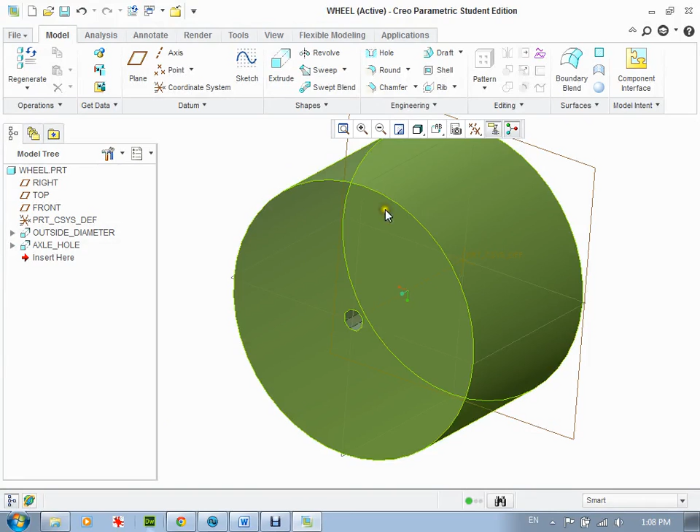So welcome back, this is now the second part of the tutorial. You'll notice that I have my basic cylinder and I have my axle shaft right now, or hole.

So what I want to do on this tutorial is add a bit of depth for the rubber or elastic bands you're going to put here for tire tread, because plastic on wood is really slippery, so we need to add something here. I'm going to take out a bit of material to actually give you a spot to put some tread. So first off I'm going to click on the object with my left mouse button.

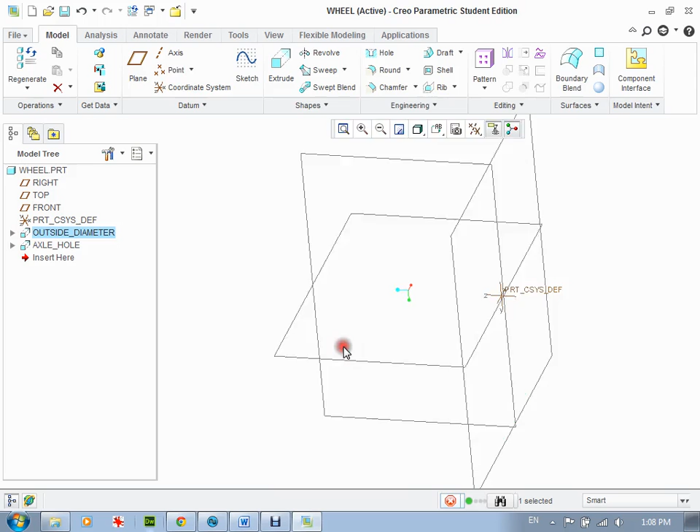Then I'm going to right mouse button, hold it for a second, and go to Edit Definition. Now this brings it back into the depth of the tire. So if I wanted to change the depth of the tire right now, or the rim, and make that 2 inches, I could just change this and put in 2. Right, way thicker now. I can just undo it up here. Okay, but I don't want to do that.

What I want to do is make sure that this cylinder, when I draw, is centered later. You notice how the drawing is over on the side here. I want to center it, and I forgot to do that in the last tutorial.

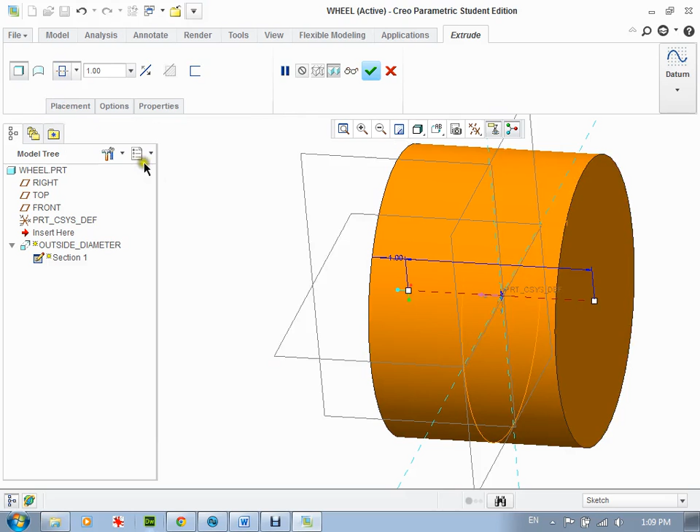So I'm going to come up here beside the 1, and click on this one, which basically makes it symmetrical on both sides, so it extrudes on both sides of the sketch plane. We click on it and all it does is move it to the center. I'm going to click OK. So now I have this plane that's in the dead center. I'll explain this in a second, but you'll see what's going to happen.

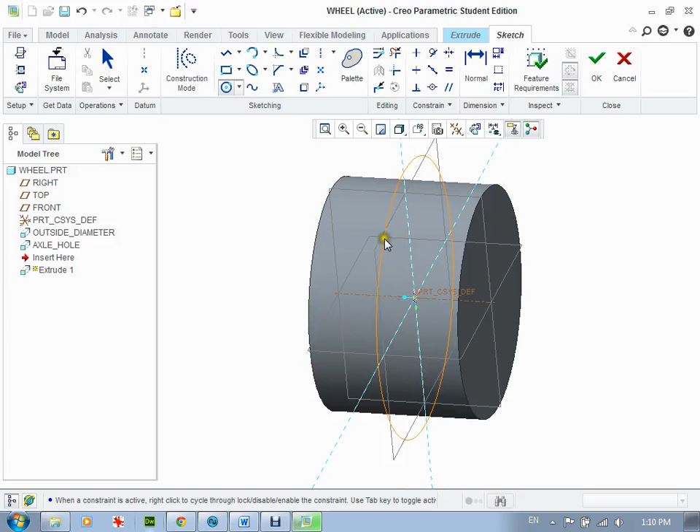Now I'm going to click on the plane and go to extrude. Now I'm working in the center of it, and I'm basically going to draw another circle, making it so that it is a bit smaller. You can't really see what I'm doing here, so it makes it easier if I go back to 2D sketch view, and you can see that there it is. The sketch is a little bit smaller, indented in. Click OK, and you can see it.

Now I can change that number. Let's change it to an easy number, 1.4. Okay, so it's a bit smaller. No, better yet, let's go 1.3. And it doesn't matter what you do, this is just an idea or a concept.

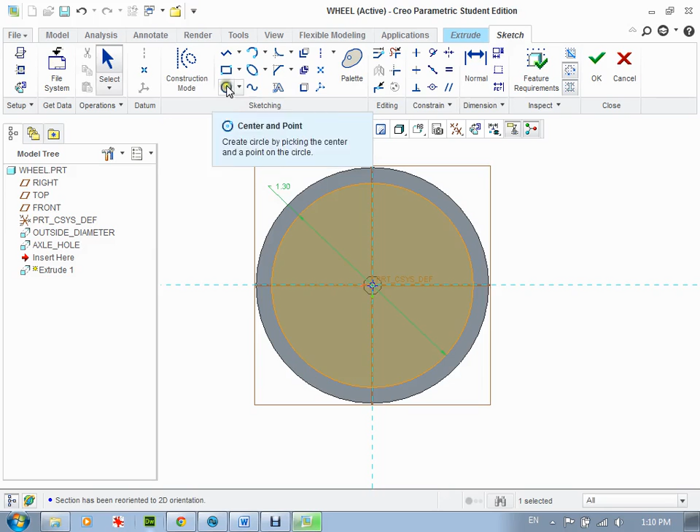Now the next thing I want to do is draw another circle, and I want that circle to be bigger than the outside, so I'm going to click it a bit bigger. I'm going to click the select tool, and now you can see that it's there and it's dead center. Now I click on OK, and you can see how it goes to one side.

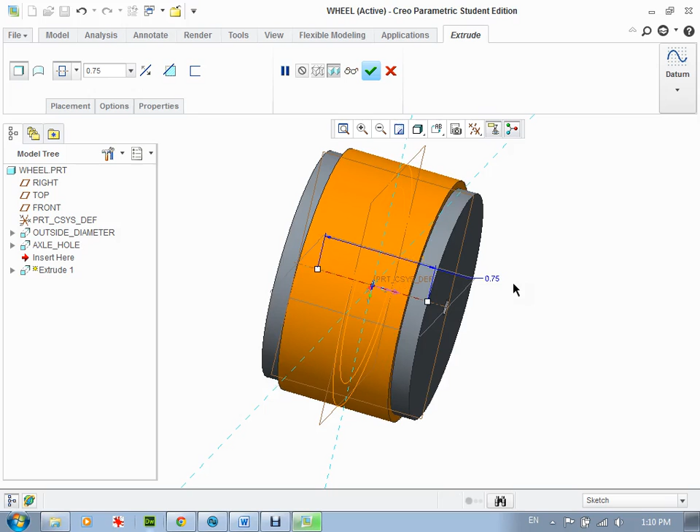But if I go back to the symmetrical on both sides, now you can see that I have a bit of depth there. I know it's 1 inch, the tire, and I'm going to change this one to 0.75, so I've got about 1/8 of an inch on each side. Then I'm simply going to remove the material, and now I have a bit of a rim. I'm going to click OK, or the select tool.

Now I'm in this, and again I'm going to click over here to the model tree, and I'm going to check it, and I'm going to call this the rim depth. Okay, there's a name. And I'm going to look at this a bit. Okay, I'm kind of getting there.

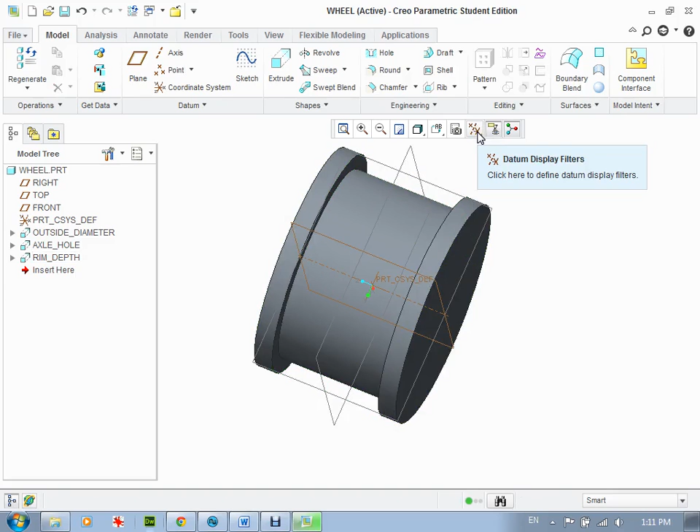Now, you notice there are all these different planes and things on here. It's getting to be a bit of a mess. If you go up here, there's the datum display filters. I can actually turn everything off, and now I can just see the object as is.

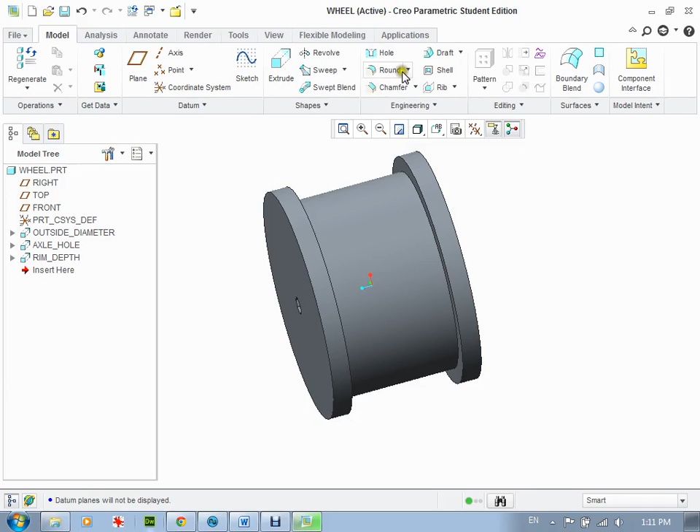So now I'm going to say, what else do I want to do to this thing? Well, probably want to round off the rim edges a bit. So I could click on an edge, or better yet, let's go to round first. And it's going to take you into a whole different thing, the round tool.

Now I can go and click on an edge, and you'll see that it automatically rounds that edge over. Now if I hold the control key down and select the other edge, and select this front edge, and select this edge, they all do it at the same time.

Now because it's 0.3 here, I can actually change that to, I don't know, 0.05, and it makes them a bit more. I can drag it. You see it can only go so far. I can drag it back, right? So I'm going to leave it, let's make it 0.06.

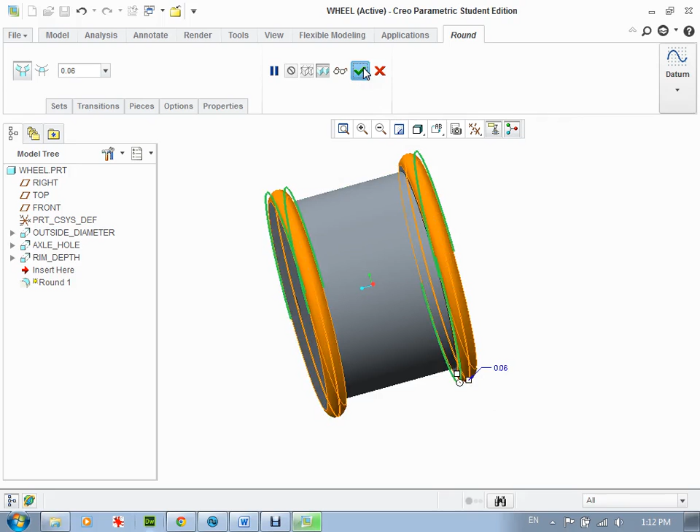And I click on apply. And now I have some edges. Now you can see, oh, it looks like there's a bit of an edge there, right? So I don't like that.

So I'm going to click on the edges, right mouse click and hold, and edit definition. Now I can go back and change this. I'm going to leave this at 0.05. Okay, so there we go. There's kind of my rim edges now. That's not looking bad.

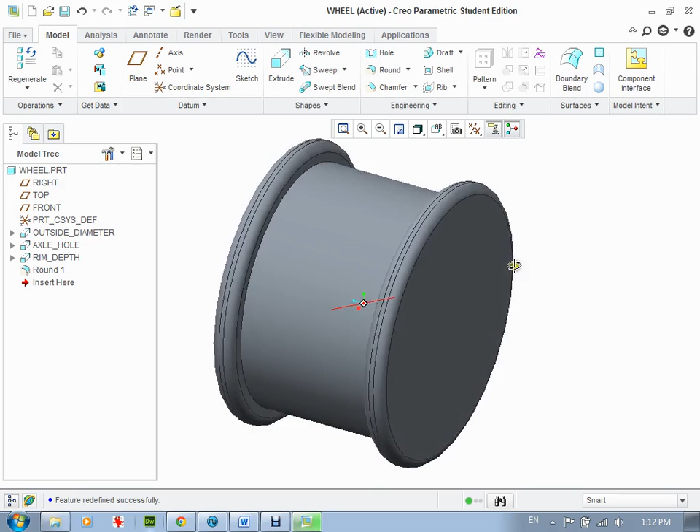Okay, now the next part, I'm going to take the front surface and go extrude. I'm going to go in sketch view, and I'm going to take a bit of a depth out of this thing. So I want my rim to go in a bit. I'm going to go OK, and now I can reverse direction.

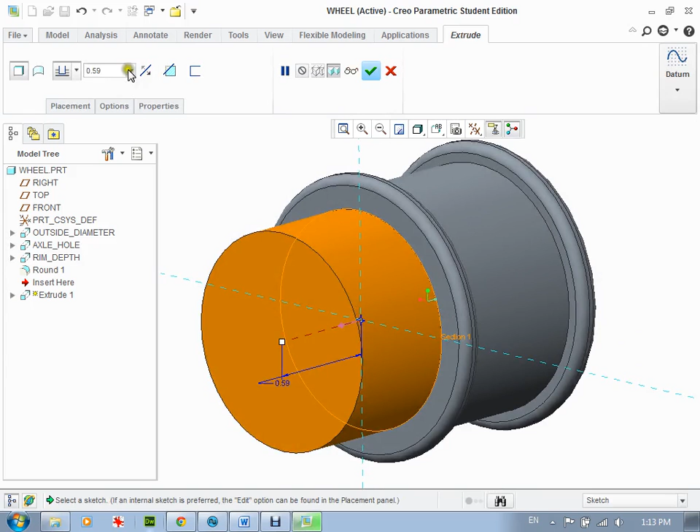Remove material, and oh, I got the axle hole through there, so I don't want to go that deep. So I'm going to take this and drag slowly until there's the axle hole, it doesn't go through, right? And go okay. So now I've got a bit of a depth there.

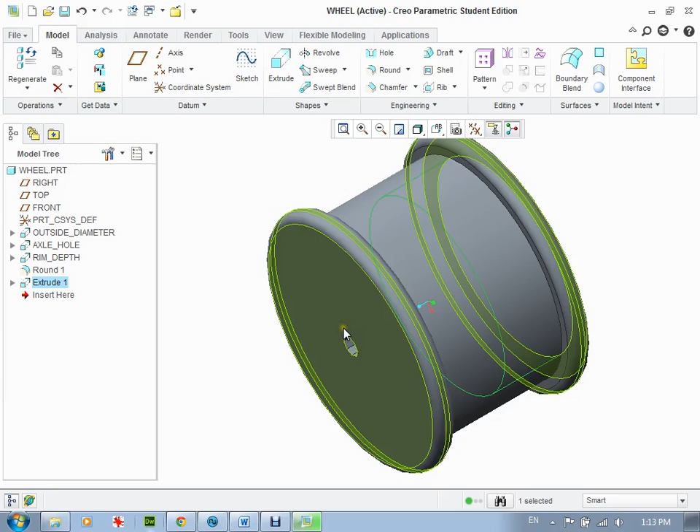Now you've got to realize when you design this, the back has got to sit flat on the 3D printer. So do not, whatever you do, take anything out of the back. Just leave it flat like that because it's going to sit perfectly flat on the 3D printer when it prints. Okay, so I've got that basically done now, and I don't like the size of that, so I'm going to go back to here.

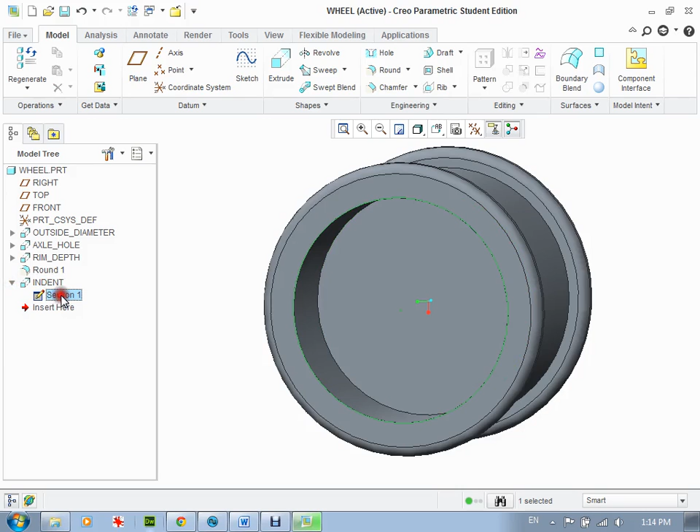I'm going to name this the, I don't know, let's call it indent for lack of a better name. On that indent, I'm going to go to the section, right mouse click, edit definition, and I'm going to make this a bit bigger. I can take this and call it 1.25. And I'm going to go okay.

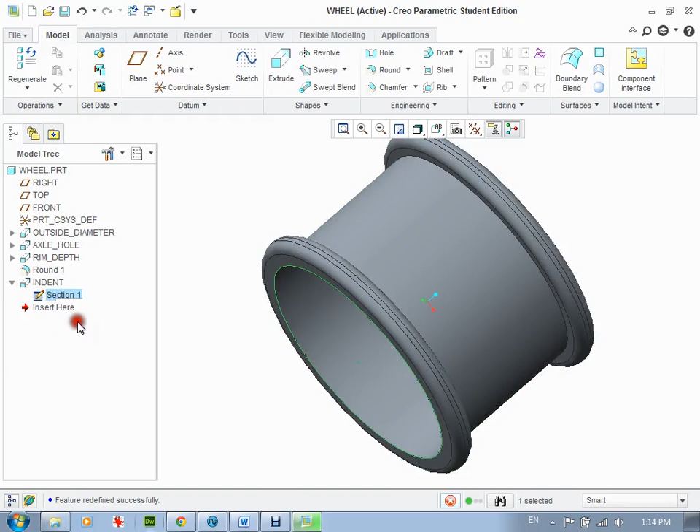And if I look, yeah, no, I didn't go through. You can always look and see, oh geez, I didn't go through, right? But if I change this and say, well geez, what happens if I went bigger? I can take this and go, I don't know, let's go 1.35. I go okay. Oops, I got a problem there, right? So the program automatically just shows you what's happening. So I'm going to undo that, and I'm going to leave it there.

Okay, and I'm going to stop at this point, and then I'm going to go on to the next thing to show you how to put some spokes in the middle of this. That concludes this part.